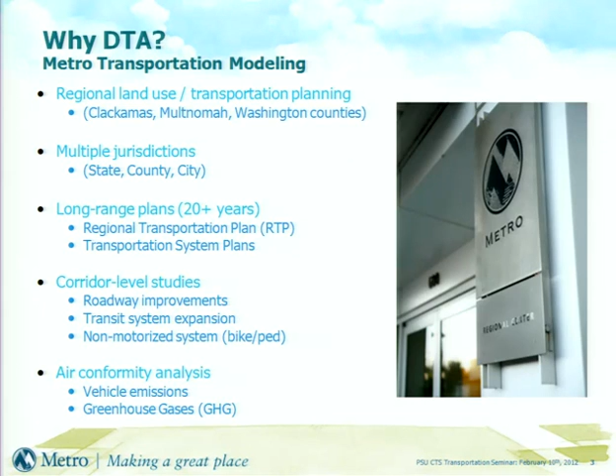So just a very rough overview of what we do at TRMS. Our main tool is our travel demand models, and these are actually a set of models tied together. They feed information into one another and run iteratively to evaluate big scenarios in our transportation plans.

The typical process that we use is a 4-step modeling process. Basically this entails taking a set of inputs, usually socioeconomic population data, usually by household. It looks at things like household income, size of the household, number of workers in the household, and these can be projections into the future.

We also look at projected employment data for the region—what types of jobs there are going to be, where those jobs are going to be located. And we look at other things like the transportation system network, various costs associated with that network like transit fares or parking costs, and some urban form variables like urban density, clusters of retail sectors, etc.

With that information, we generate a set of trips—a forecasted set of trips for the region. That's our generation step. Once we've generated those trips, we determine where those trips are going to go—that's our destination choice. Once we've determined where those trips are going to go, we look at mode choice.

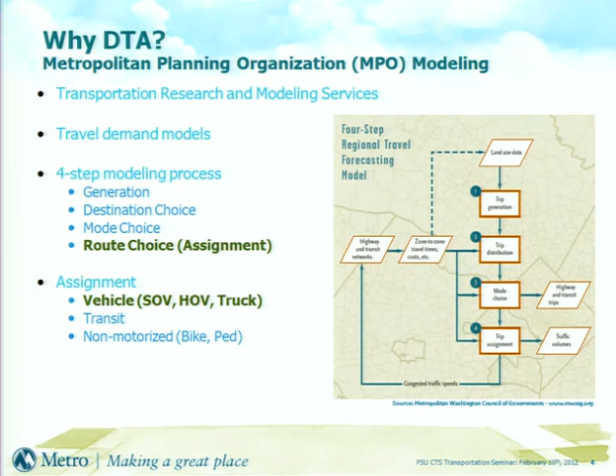We're really focused just with the vehicles right now for DTA.

So in the past, some of the modeling questions have been: what are the volumes on our system, where are people going, how does the system look. If you're looking at a specific corridor, you might want to set some sort of existing condition benchmark and see how that changes as you go into the future, and how volumes change as you evaluate different scenarios. From our static models, we were able to pull out volumes, average speeds, and travel times through the corridor.

The other thing that we look at is the volume to capacity ratio—how much traffic is using the system relative to the design capacity of the system. In areas where that demand is really pushing the limits of the capacity, we looked at that and said, okay, those look like trouble spots. Let's focus in on those areas and see what we can do.

Oftentimes, the way you dealt with that was to build your way out of congestion. And I don't just mean building extra roadway capacity or highways, which is certainly one alternative, but also building alternatives such as transit systems that might help alleviate some of the congestion in that area.

However, as we move forward into time, especially as we start projecting out to the year 2035, 2030, we're noticing that our networks are becoming more and more congested. We're at a point now where we've reached the tipping point where we're not going to be able to build our way out of this congestion any longer.

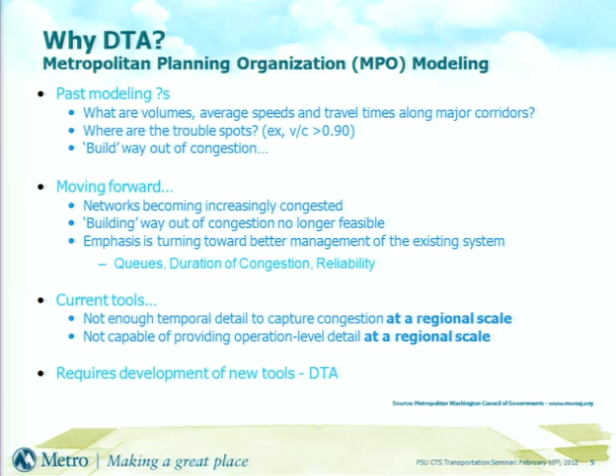Our current tools right now don't have enough temporal detail to actually capture congestion at a regional scale, and they're not capable of providing operational level detail at a regional scale. I'm talking about the macro and micro assignments. This requires the development of new tools.

Now I'm going to dive in and give a very general overview of the different assignment resolutions. Macro assignments are deterministic models based on the relationships of speed and density on a traffic network. By deterministic, I mean if you put in the same set of inputs and run your model 100 times, you're going to get the same solution set every single time. There is a single solution.

As opposed to stochastic, where you introduce probability and randomness — you run your model 100 times and you'll actually get slight deviations in your solution set every time. That'll become more clear as we move further through the presentation.

Furthermore, trips are aggregated into time periods by zone pair. We're not simulating individual vehicles with a macro simulation, or a static assignment. What we typically model at Metro is a PM 2-hour peak period, 4 to 6 p.m., which is generally the highest demand period for our system. So we look at the total number of trips that occur within that 2-hour period, not individual trips — we can't distinguish between trips that happen at 4 o'clock versus 4:30 versus 5:30, etc.

We do distinguish between vehicle classes — we have SOV, HOV, and truck classes. But because all the trips are aggregated, those classes are homogeneous: all SOVs behave the same, all HOVs behave the same, all trucks behave the same.

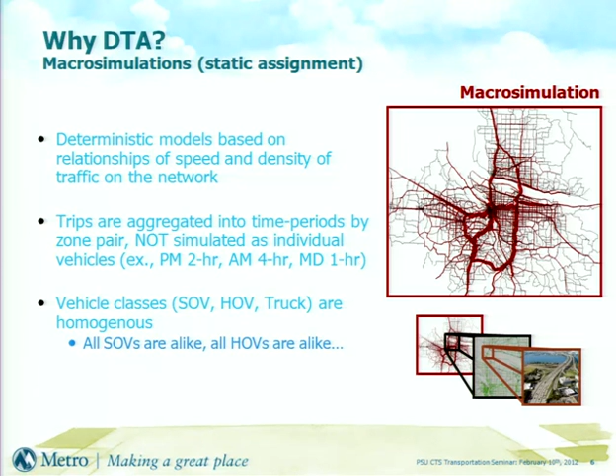Peter, just in case, you might want to define SOV and HOV. Okay, sorry about that. SOV is single occupancy vehicle, so it's a single person sitting in their car. HOV is high occupancy vehicle, so that's 2 or more people. We define HOV as 2 or more people in this region; other regions define it as 3 or more, etc. So if you have a passenger in your car, that's HOV.

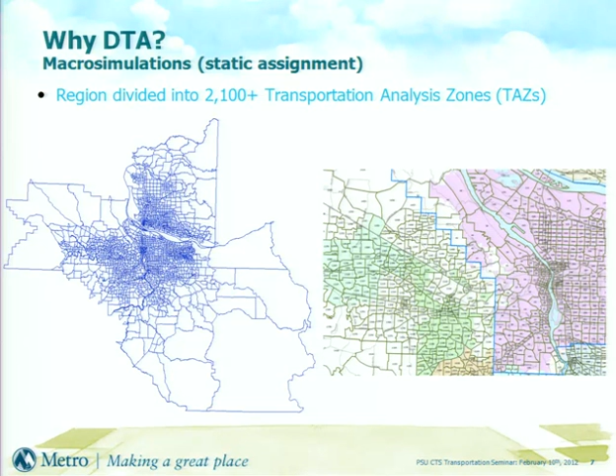Basically what we have is our region, which in our model includes Clark County in Washington, because even though that's not part of Metro's jurisdiction, Clark County plays a very important role on our transportation network. Our region is currently broken into about 2,100 transportation analysis zones, or TAZs, and we're analyzing the trips between each one of these zones. Zones tend to be more dense where population and employment are more dense, and they tend to be bigger in very rural areas.

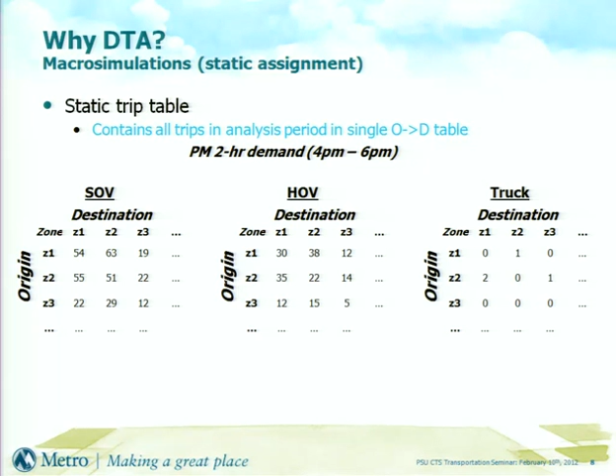Once we run our model, we create trips that are put into matrices representing every zone-to-zone movement in our system. So if we have 2,100 zones, there's a matrix that's 2,100 by 2,100 — that's 4.4 million zone pairs. We're basically populating these huge matrices that show all the trips between these various zone pairs for each of our vehicle classes. So here we have zone 1 to zone 1 — those are internal trips, 54 SOV trips in a 2-hour period, 4 to 6 p.m. From zone 1 to zone 2, 63; zone 1 to zone 3, 19; and so on.

On top of our zones, we have a representative transportation network overlaid. This network does not contain every single facility in the region, so we don't have most of the local streets, but we do have major facilities like freeways, arterials, major and minor, and major collectors. We also have the full transit network overlaid on top of this.

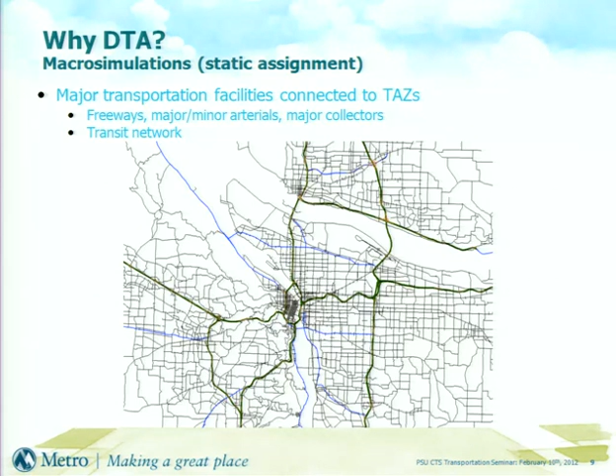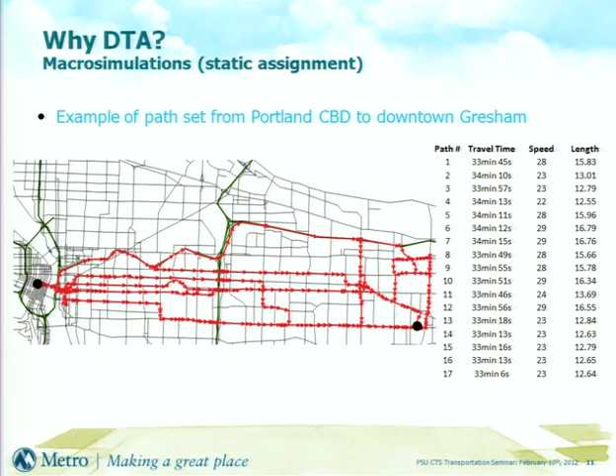Now, there are some idiosyncrasies with static assignments. The main one is that they will assign total demand in your time period regardless of whether or not that demand exceeds the design capacity. In this case, it's exactly like the other example, except I've increased the demand to 4,000. However, our hourly capacity is 1,800 here and 1,200 here, so it's only 3,000. Now our travel time is 75 minutes at equilibrium.

If we were to look at the output from this model, we would see all of those trips, 4,000, occurring within the 1 hour time period. However, the true travel time is 75 minutes. We know that a lot of these trips would not be able to complete their journey in that 1 hour time period, and this is an issue with static assignments. Because they're not constrained, they don't allow for queuing or congestion to build up on your network, and so sometimes they can give you results that are not intuitive.

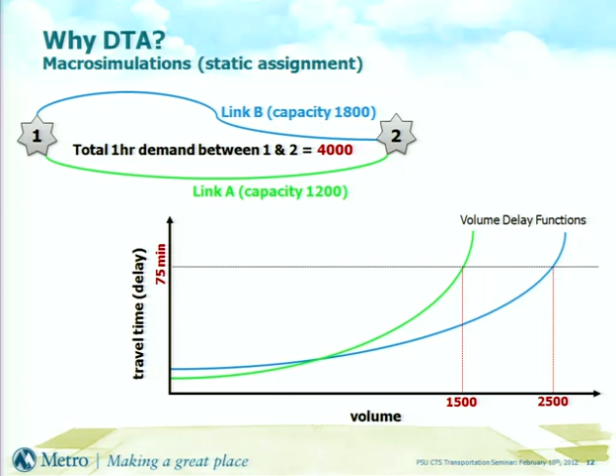Here's an example of what happens. I know the legends aren't very legible here, but on this side we have volume to capacity ratio, so this is the demand relative to the capacity. The reds are where they exceed 1.

So that means there's more demand on the network than it was designed to handle. This is what happens in very congested conditions on our networks with static assignments. We have a lot of red through here on our freeways, but it doesn't tell us anything about where the congestion began. You can't tell if this entire link is congested or just really congested right here, and you don't know when it began. If this is a 2-hour assignment, I don't know if the congestion began at the beginning or the end. It's just assumed that the entire assignment has the same characteristics.

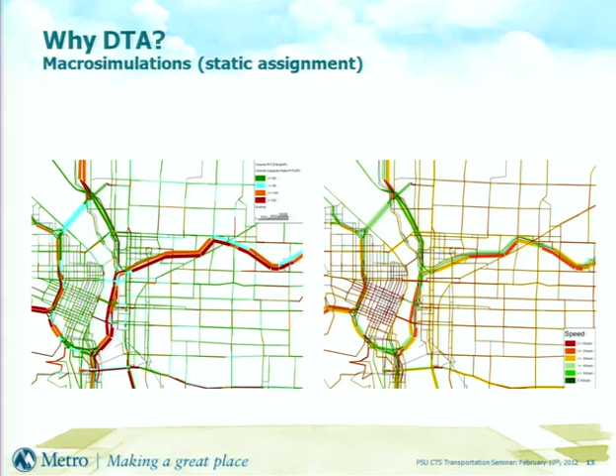On this side we have speed. There's actually not even a legend shown - oh, there it is. What I want you to get from this is that the speeds are the same for the entire time period, so it's average speed essentially. Here it's showing orange, which is like 20 miles per hour. So it's saying that for the entire assignment period, in this case a 2-hour assignment, the average speed was 20 miles per hour for everybody going across there. And we know that's not the case - we know there's variation in travel times over that 2-hour period. 4 o'clock is going to look a lot different than 5:30 or 6 o'clock.

Okay, so again, just to reiterate, the pros of the macro simulation is route choice capability. It's fully integrated with our regional travel demand model, so there's very little work needed for us to pull results out and feed them back into our model. It's computationally very fast, and it works well at a regional scale.

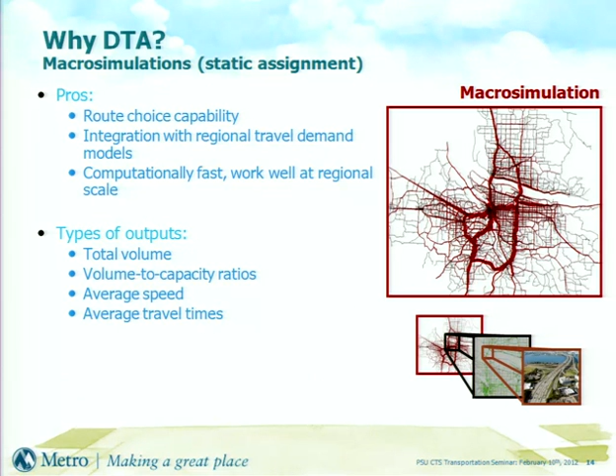Typical types of outputs we've gone over. The cons are that you get volume to capacity ratios that exceed 1, and there's no queuing because of that. You also have no temporal dimension to your data, so you're not able to analyze bottlenecks or queuing. Again, you're looking at aggregate trip tables, not individual vehicles. So you can't produce queue formation spillback profiles, you can't measure the length or duration of congestion, and you can't do things like looking at individual profiles to get really precise emissions estimations.

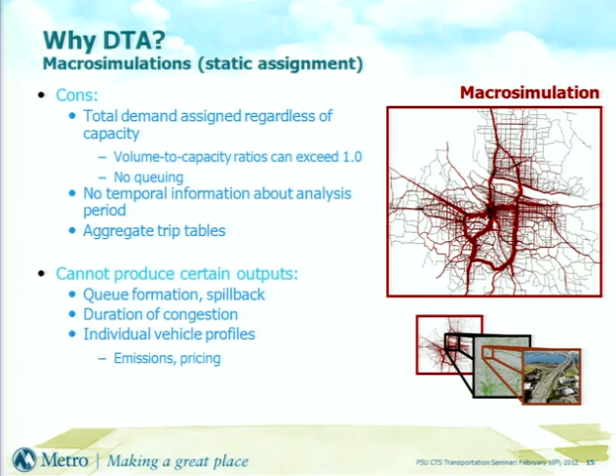So then we have microsimulations at the other end of the spectrum. These are stochastic models, so there's actually variability and probability entered into them, and they're looking at the individual level. You're actually modeling individual vehicles - looking at acceleration, deceleration of those vehicles, the merging of vehicles on a lane-to-lane basis. You can have things like politeness, how likely am I to slow down to let somebody merge in front of me. You can look at things like gap acceptance - how much time do I need before I make a left-hand turn across incoming traffic lanes.

And they're really great for evaluating operational projects - looking at ramps or auxiliary lanes on your system, intersections, traffic signals, determining decision points, like where should I put signage on my system to alert drivers of an upcoming off-ramp or merge area.

Because you are simulating individual vehicles, and doing it in very, very small increments of time, you're getting a continuous stream of data, so you're gaining a temporal dimension to your data. The vehicles are confined to your roadway capacity, so once the demand and flow of vehicles on your roadway reach a critical point, you begin to see things like queues build up, congestion, and spillback, and you can measure that on your system.

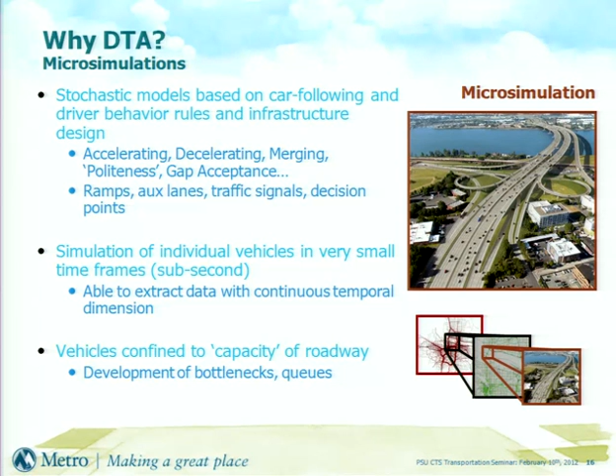Pulling out that temporal dimension of data is what I want to impress on you as the important part of the microsimulation, and this is my attempt to show you how that data can be used. Some of you might be familiar with these diagrams, many of you probably not. They can be a bit confusing when you first see them, but there's an incredible amount of data in these space-time diagrams. They're also sometimes referred to as brain scans.

What we have on the y-axis is a corridor. This is actually I-5, with the Columbia River Bridge right here, and this would be where I-5 meets 205. So you actually have vehicles traveling in this direction along I-5.

The x-axis is your time. So as you move from left to right, you're moving forward in time. And then the colors represent your speed. Colder colors are faster speeds. Warmer colors like yellows and oranges and reds represent congestion or slower speeds.

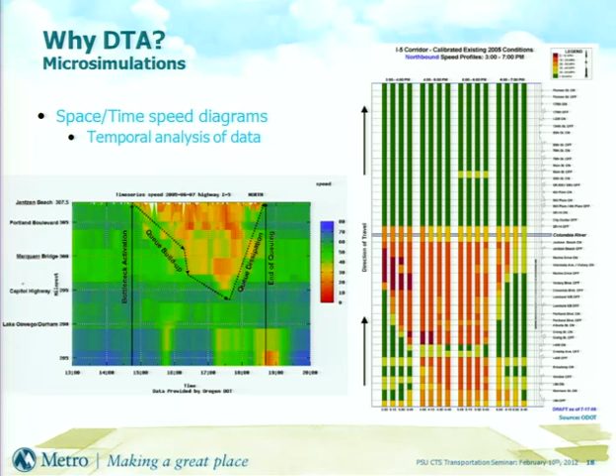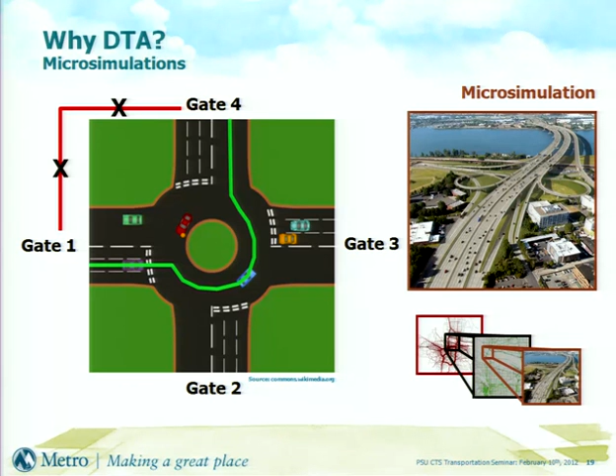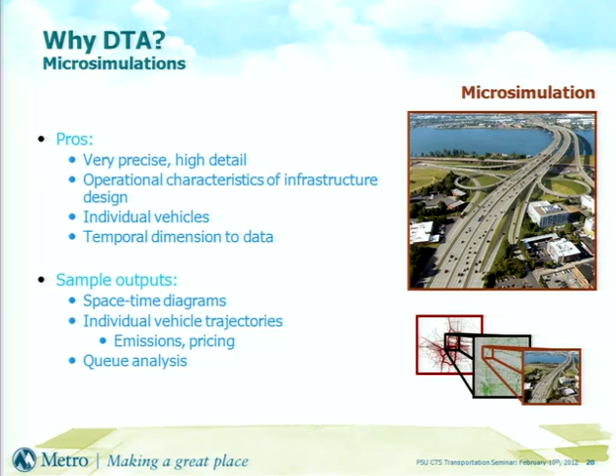So again, microsimulations are very precise, lots of detail. We like their operational characteristics, and we like their temporal dimensions. They're great for producing space-time diagrams and individual vehicle trajectories, and they're great for doing queue analysis.

The cons are that they're very time-consuming to develop and calibrate, and because they're time-consuming, they can also be very expensive. They're computationally very intensive because you're measuring every one of these vehicles in almost sub-second time frames. The vehicle paths are fixed, as we pointed out, so that can oftentimes lead to an overestimation of delay through a network if vehicles aren't allowed to choose alternative paths, and you can underestimate speeds through a corridor if you haven't calibrated your network properly.

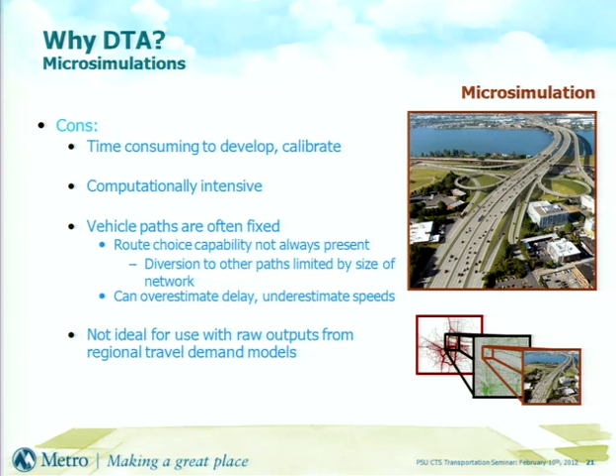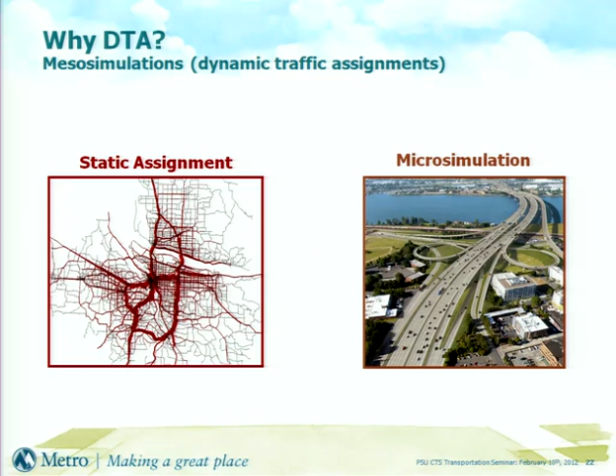So what do we do? We have the route finding capability of our static assignments and the temporal profile of our micro assignments, and we end up with DTA here.

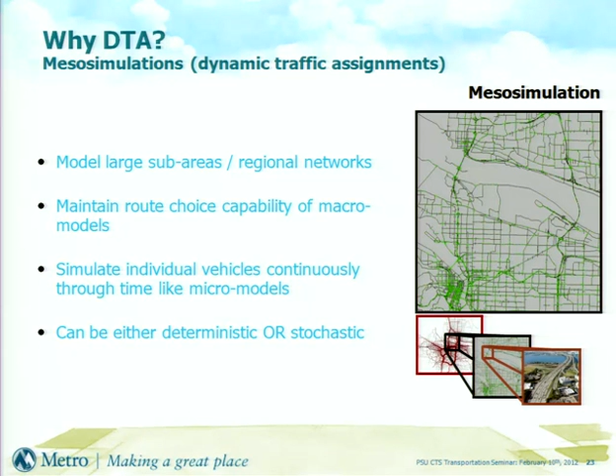So DTAs are great because they model large subareas, or we've even run our entire regional network in them before. They maintain the route choice capability of the static assignment of the macro models, but they also allow you to simulate individual vehicles continuously through time like the micro models. And the way they do that is you don't have as much behavioral detail associated with your vehicles in the DTA. And they can be either deterministic or stochastic. Vehicles are limited to the carrying capacity of your network, so you do get queue formation, you do get spillback, and you can begin to measure those things.

You can also begin to measure things like how trip characteristics change through time. So my trip from Portland to Oregon City when I drive home at night is different at 4 o'clock than at 5, which is much different than at 5:30. And you can begin to measure those differences with the mesosimulations or the DTA.

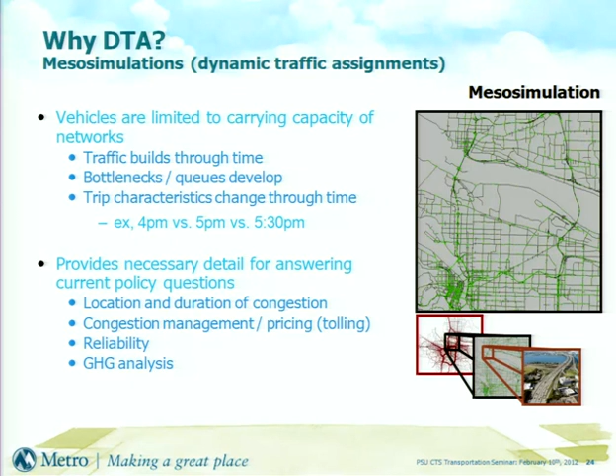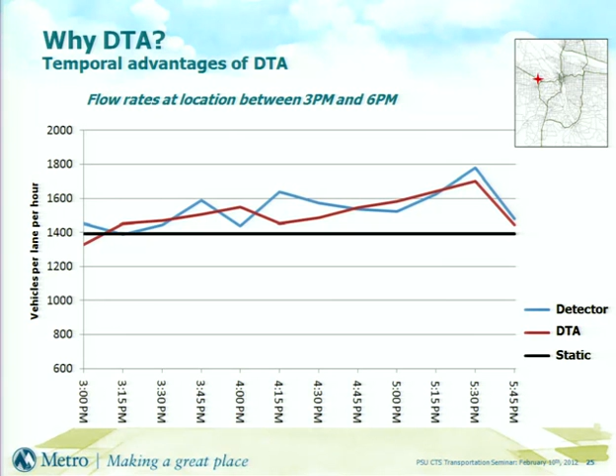If you look at the black line, which is our static assignment results, you just get an average flow rate for the entire time period. It's actually lower than what the real world or the DTA data show, and it tells you nothing about a bottleneck influence in this particular area.

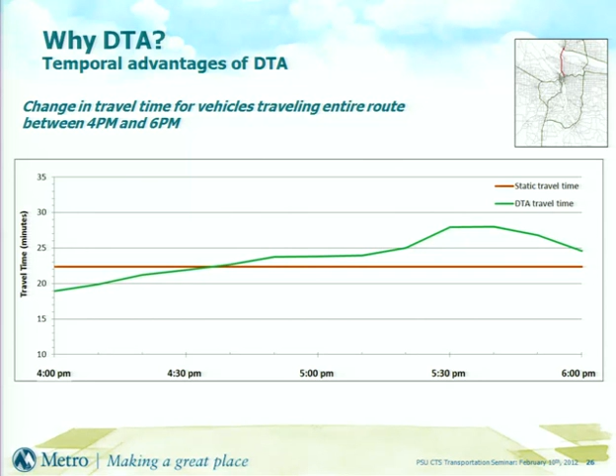Whereas in the DTA, we see that at 4 p.m., our travel time is 19 minutes. By 5 p.m., we're up to 23 minutes. And by 5:30, we're up to 27 minutes. So there's a big difference in travel time experience across that time frame. And this much more closely matches what's happening in the real world.

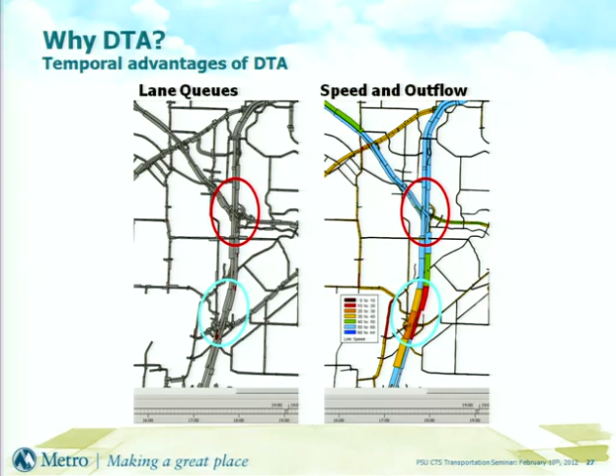So that's really exciting for us. In the past, we just had a single snapshot of that network, and we had to make a bunch of assumptions about where congestion might be occurring on it. With this, we can actually see where the congestion is occurring, when it actually begins, when it ends. As you can see, it's very dynamic.

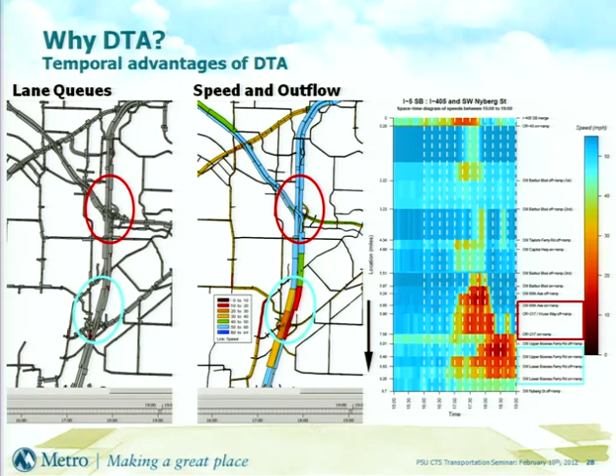You can see that right now we've got long queues, lots of congestion. We're capturing that here and here. And I'll continue moving through time. It's dissipating. And what's great about this is, again, with our model now, we've been able to capture where the bottlenecks are, how much of the facility is impacted, and how long that lasts. So we have a really good, almost three-dimensional level of detail as to what's happening on our system.

So I know from my own personal experience, if I drive at home on Monday at 5 p.m., I get one travel time. If I do it the following Monday, I'm going to get a different travel time. If I do it the following Monday, I'm going to get an even different travel time. There's little variations in my driving experience every single day. And that's just due to driver behavior. All these things begin to add upon each other, and little variations in driver behavior and signal timing, when you get to a signal, etc., impacts how long your trip is.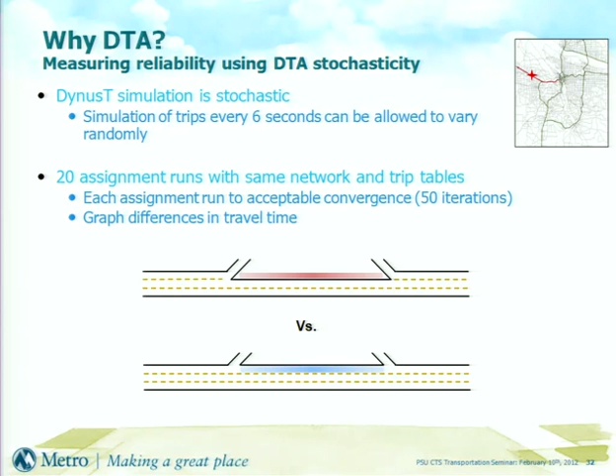So what we can do is we can actually take that information and we can start to build reliability. How much variability is there between day-to-day travel times? So what I have here are two scenarios. Again, we're going to look at travel times on US 26 westbound from downtown out to Cornelius Pass Road. It's a pretty long corridor. And at this location, we're changing the network. So here we have 3 lanes. We have an off-ramp. And this lane is dropped in between the off-ramp and the following on-ramp. In this situation, I've just continued that 3rd lane all the way through. So it's a pretty simple demonstration.

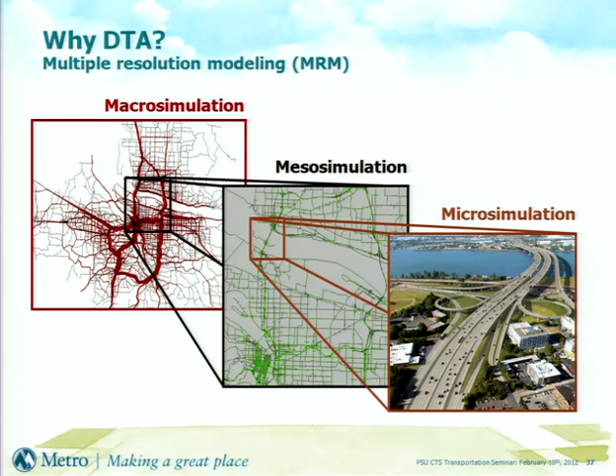Of course, there's this idea of multiple resolution modeling, where you don't just use a single resolution of model. You use the resolution that's most appropriate for your task at hand. So we're going to continue using static assignments for use with our travel demand models. And microsimulations are still going to be used for very high detail operational design problems. But in the meantime, if we've got these questions that aren't quite operational, like how big should our merge lane be, but we still want to get information about when's congestion forming and how long is it lasting, the DTA is a perfect tool for that.

So moving forward, we're going to start applying this in our corridor level studies. We're going to begin integrating it with some of the emission software that's out there so that we can get very high quality, precise greenhouse gas estimates and emissions estimates. Eventually, we will be developing a transit and bike/ped component to DTA. Once we do that, we'll be able to integrate DTA into our larger model framework.

We are developing more advanced models. We have an activity-based model coming out soon in the next couple years. That's soon to me. And we'll actually be modeling individuals, not just in their vehicles, but in their day-to-day choices even. And eventually, the DTA may replace the static assignments at some point once we get some of these other components added in.

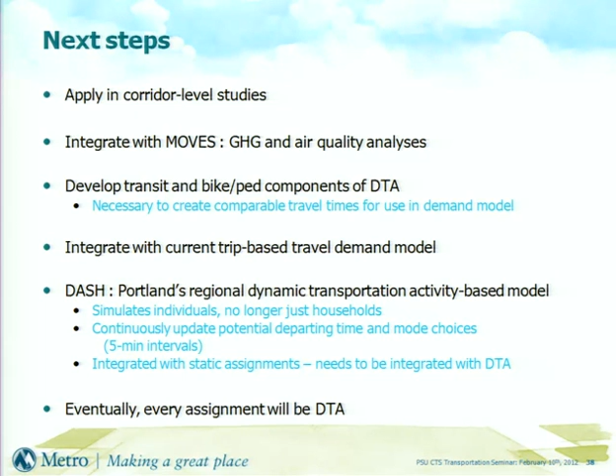I was just wondering, with all this modeling and information, what's the time period between solving and implementing? How does that process work? Like you find a big congestion area, but what do you actually do? How do you make those adjustments?

Sure, so there's two ways you can use this data. You can use it at an operational level—what are things we can do in the short to medium term to alleviate that? That might be adjusting ramp meter rates or signal timing on parallel facilities so you can increase route alternatives for travelers.

And then there's the question of looking at long-range scenarios, these planning alternatives—looking at packages of projects together and how they impact the system. At Metro, we do some operational stuff, but when we're doing our planning, we're looking more at the medium to long term. I don't think it necessarily speeds up the planning process, but it gives us additional information to consider, and that might actually impact the types of projects that go into our future plans.

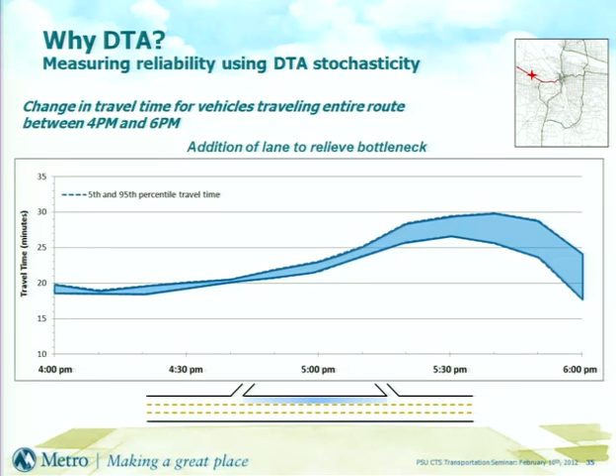You mentioned in the future developing similar modeling for transit and ped bike infrastructure. I'm wondering what kind of impacts the simplification of the behavioral variability would have in that setting, and whether it would have more of an impact. I don't know if there's more variability in ped bike behavior than in motor vehicle behavior.

Let me just start by saying the ped bike stuff, well, I think transit is probably the next step, and that's actually still being researched right now. Outside of our agency, that's still at almost the academic level. The way that will be represented in the DTA is not only transit vehicles moving differently through time, so buses being stuck in congestion, moving differently through time, queuing up and then dissipating, that'll impact your transit decisions. Am I going to wait for this bus or take that other bus? So that's the next important role, is getting transit in.